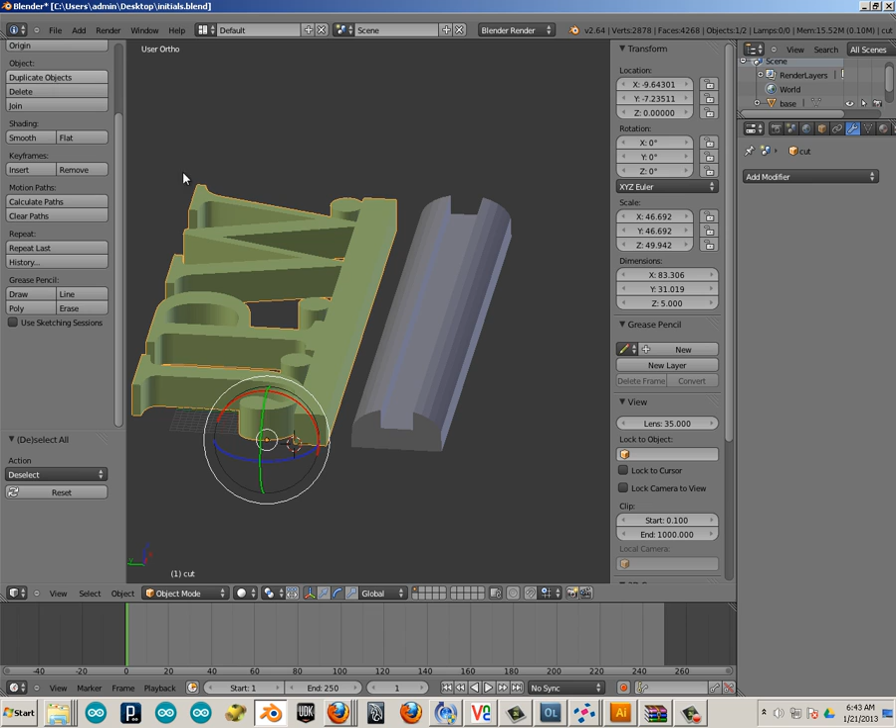Now, some things you can do to speed up the process is to eliminate as many triangles as possible. To do that, you could bring it back into Blender as a stl file. Let's say you had a repaired stl file. While that's processing, I'll talk about this.

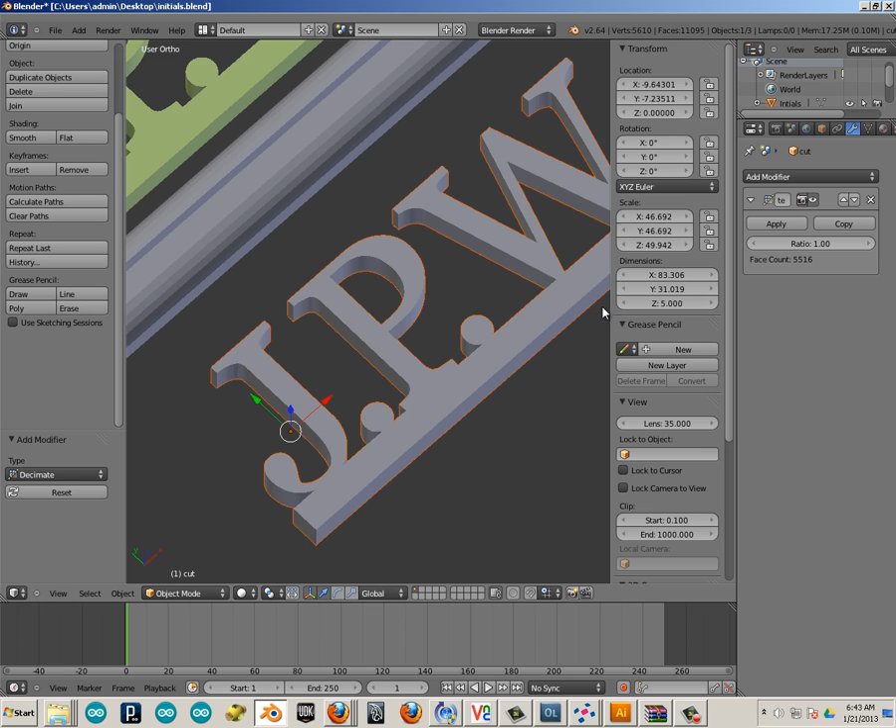I could take and import the stl of the initials. This is the cleaned up one. Drag it down, and then I can use decimate. Decimate will allow it to reduce the number of polygons. So I can decimate this down, but the minute I see some degeneration occur, I'm just going to click it, click it, click it, until I start seeing some degeneration happen.

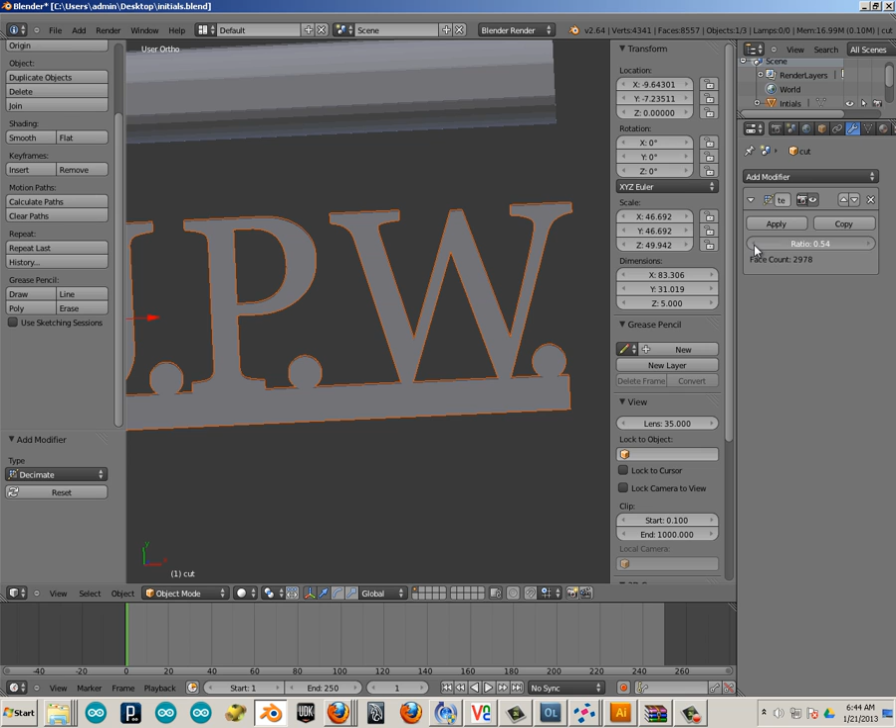Degeneration happens when you'll see that these blend. That's not too bad, actually. So look at the polygon count just soaring down. Okay, so I don't want to get greedy. That's pretty good, and I can hit apply, and then I'll export that.

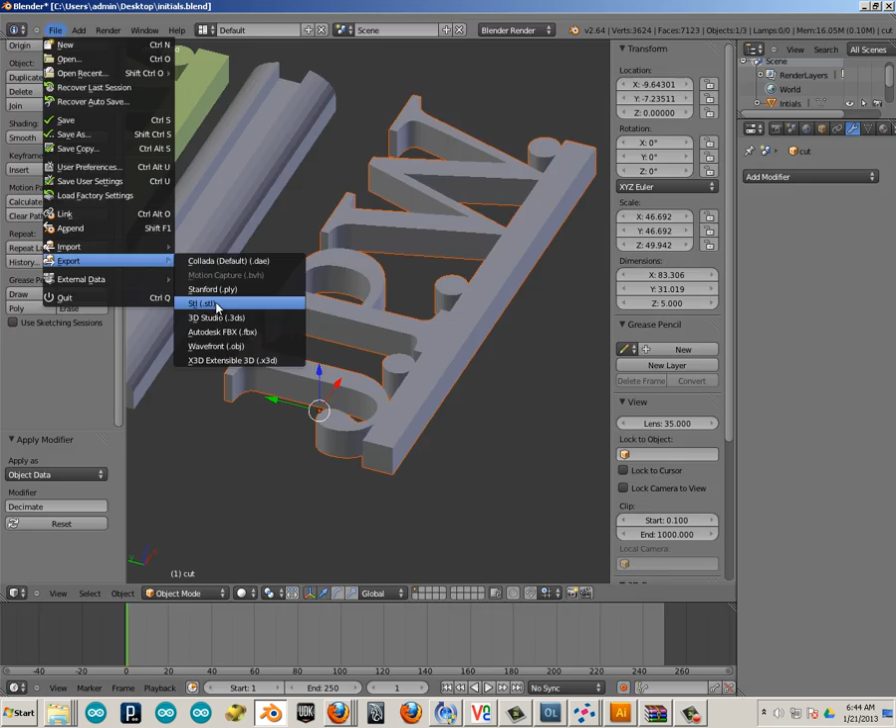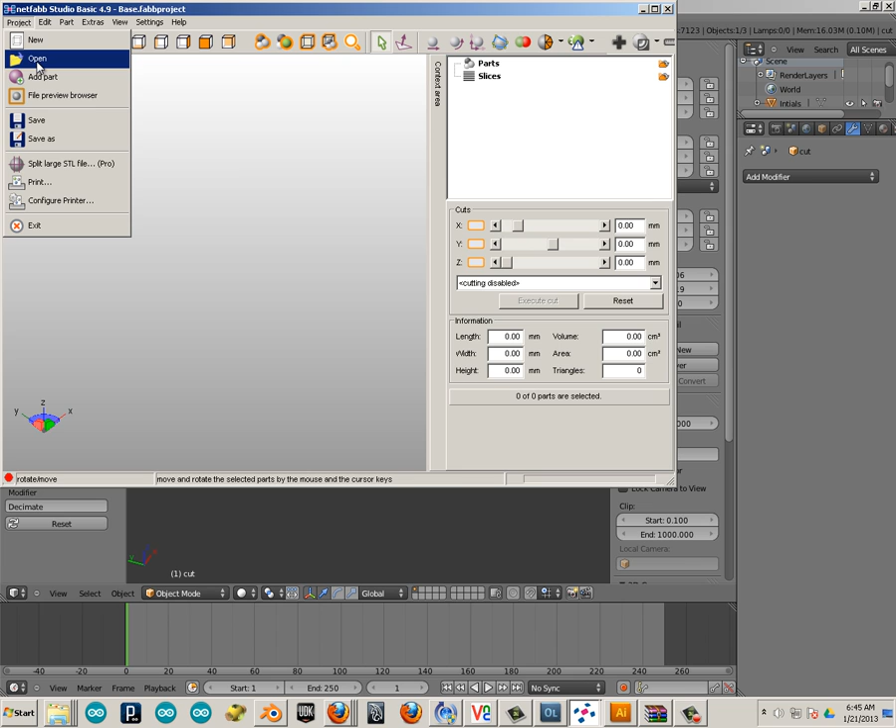As initials low res. LR is what I put there. And just make sure when you do that, you go in here and repair that, because a lot of times when you remove a lot of triangles from something, it could cause holes. So let's open, and here's my low res one, and it looks perfect. Not much as far as automatic repair is concerned, but still. Export, stl, and I can call that low res.

Alright, here we go. It looks like the high res worked, but I just wanted to show you the process of cleaning up and decimating something down so it rips a little faster. You'll see a significant difference once you export that other stl. But for right now, I'm just going to keep the high res, and I'm going to go into the printer interface.

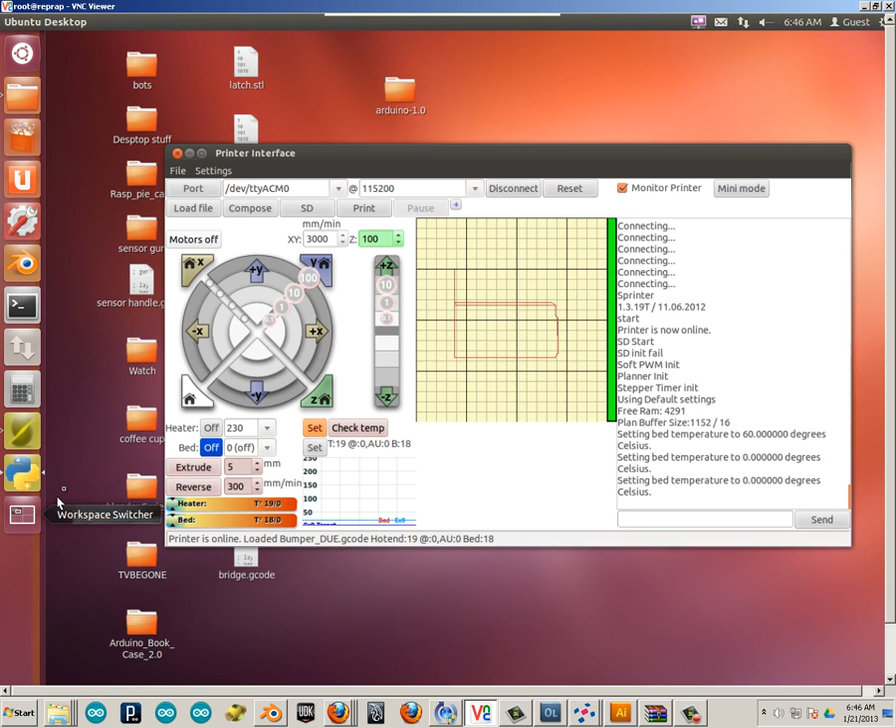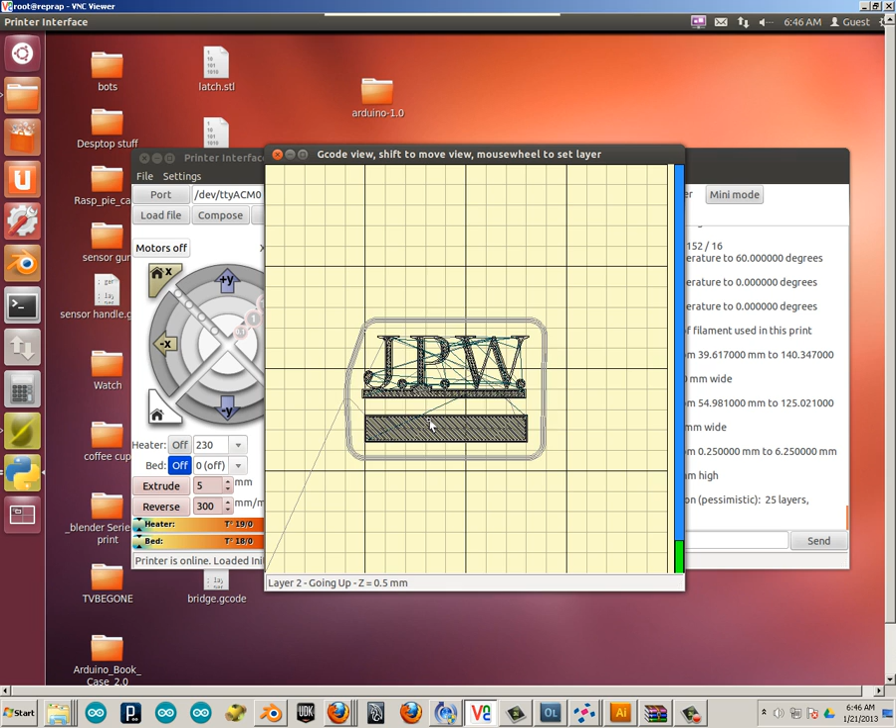In this case, I got 3 printers. I'm going to go to the newest one, and let's load that file. Okay, double click on it, and then you can page through this. Just hold shift and make sure everything is filling correctly. Make sure you're getting all the letters.

If you look at the W here, it's very thin. It's not having any kind of fill between these 2 lines right here. Okay, so if you see that, that's a big red flag. You could repair it, and all you do is go back to slicer and lower that down.

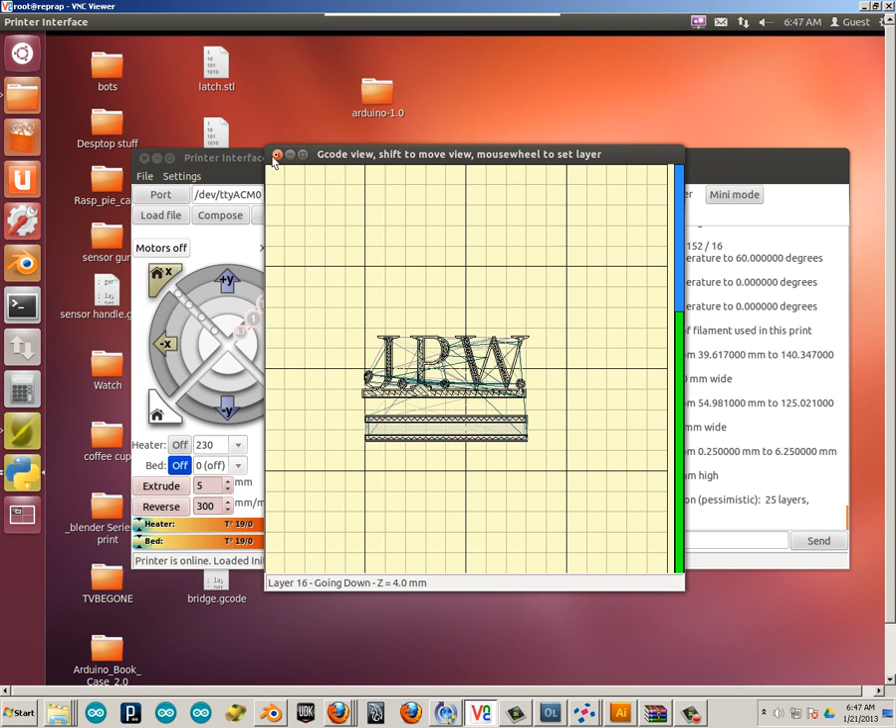Okay, so in this case you would lower this number down to 0.35, and I know that's a pretty big jump, but do it. Even though you have a 0.5 head, it'll actually work out correctly. Anything going past that much, let's say you have to go to 0.25, don't do that. That's a little bit too hard, and you'll see some bad stuff occur because of going down too low.

So 0.5 can reduce all the way down to 0.35. Same could be said if you have a 0.35 head on your 3D printer, you can go down to like 0.25. I wouldn't go any lower than that. So keep it within some kind of ratio.

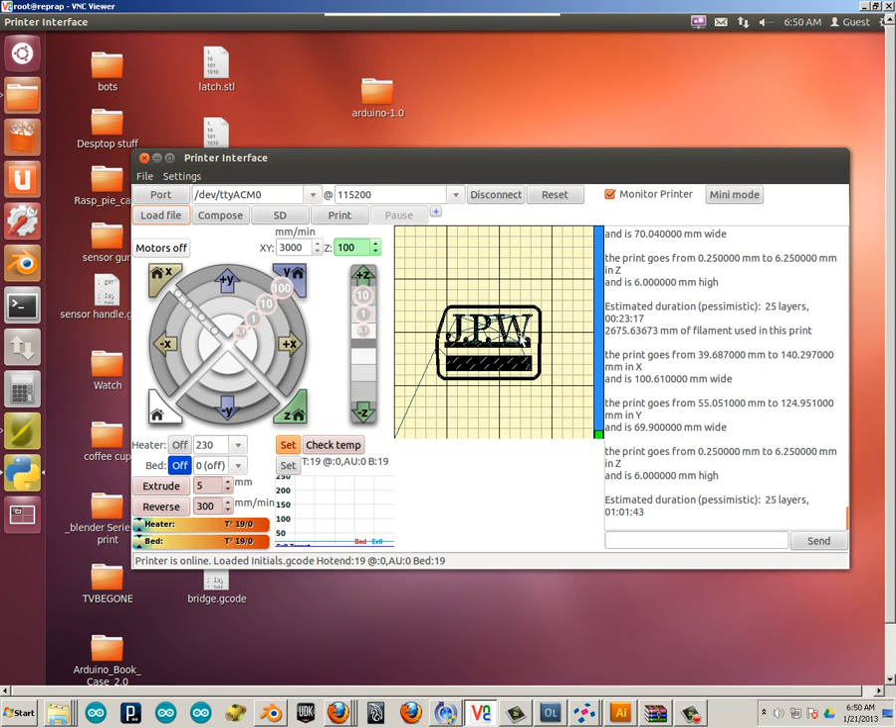Alright, now let's go look at that in the 3D printer, see how that looks like. So jump back over to my printer, load the file. Double click on it, and you can see clearly the W is now being filled in and is solid wall. So that is good. Alright, I'm going to print this and we'll take a look at it.

What I would highly suggest is there is no real need for a fan on this because it's not standing up. Anytime an object is standing up, a fan should probably be put on it with the amount of detail. But really this is all flat 2D, 3D type of label, so you should probably just let it ride and print it out. Okay, and then come back in the next video. We'll look at things you might need, maybe not need, or how the outcome looked.